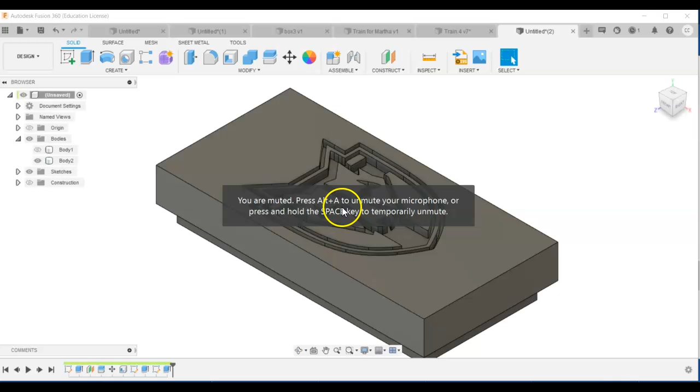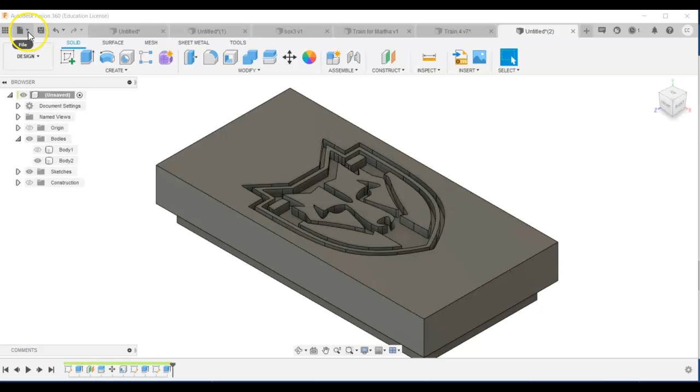Okay, in our last video, we showed you how to insert a graphic and use it for things like an extrude cut like this. But we want to make a box that is nice. We don't want this rectangle. The rectangle constricts us. And so for this next one, and this is your assignment, you're going to make a box that's based on the design.

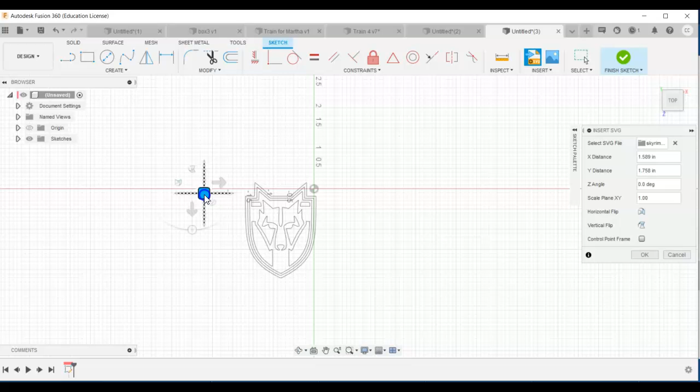So I'm going to go ahead and put another top-facing sketch and insert that same Skyrim SVG. So there it is. It's in my downloads, and there it is. It's a little big, so I'm going to pull it over, and then I'm just going to shrink it to what I think is about 2 inches by 4 inches. Maybe a wee bit bigger than that, and just kind of center it over the datum. And when you get it someplace nice, say okay, and now we're looking at it down from the top.

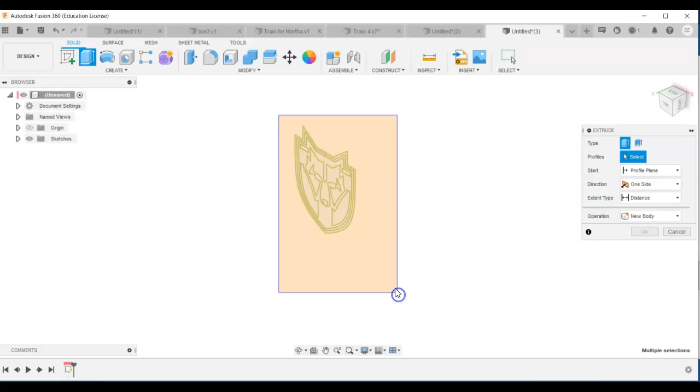The next step is to select everything. Let's finish the sketch. Select everything, and we're going to extrude everything. And we don't want to go that way. We want to go this opposite way. So how big was the box? 1.2. Just looking at it and the size it is, I'm going to go 1.5 negative. So that direction is really going to make a big difference in a minute. And right now you can't see it, but the sketch is right there, and that's kind of where we need it to be.

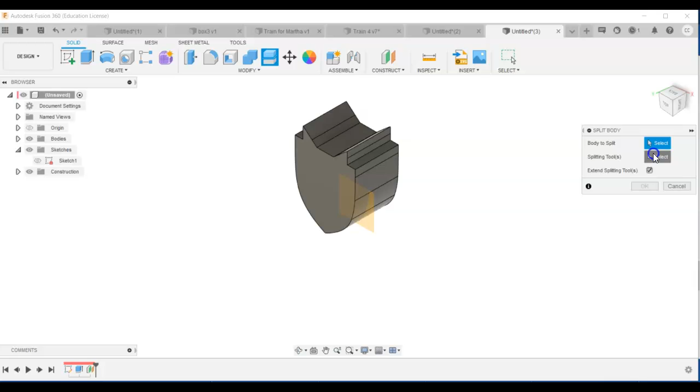So using the same tool we did last time, I'm going to put a plane on this face, and I'm just going to offset the plane by 1/2 inch. And then I'm going to use that split body tool, and here's the body. My splitting tool is once again the plane, and I guess it didn't pick the body. So there we go. And now it's going to split. For this one, I'm going to leave the top of the lid in place, and I'm going to move this part back. And so there's the big part of the box, and here's the lid for the box.

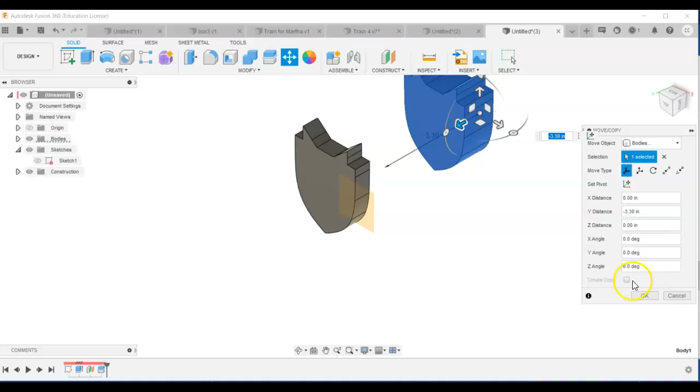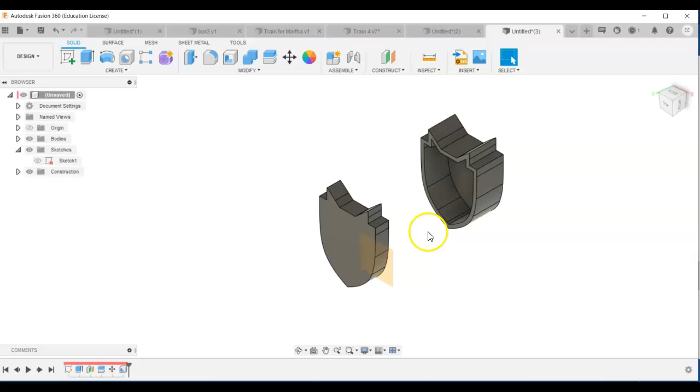While this is groovy, I'm going to go ahead and shell this. And my wall thickness is going to be, let's go 0.125, so 1/8 of an inch. All right, and so that looks pretty good with the ears and everything. I was kind of worried about that. I'm going to go ahead and flip it and make this body here, body 1, invisible. I'm also going to make the plane invisible.

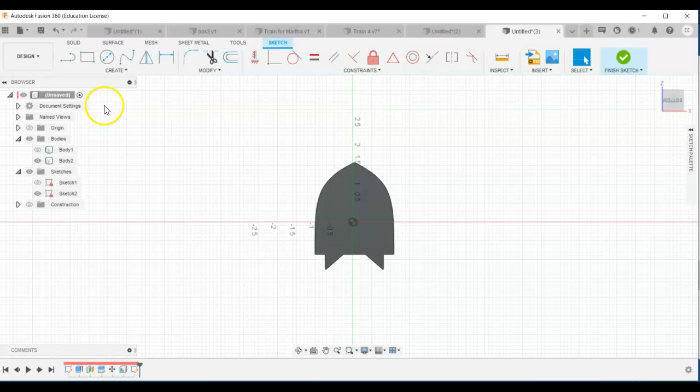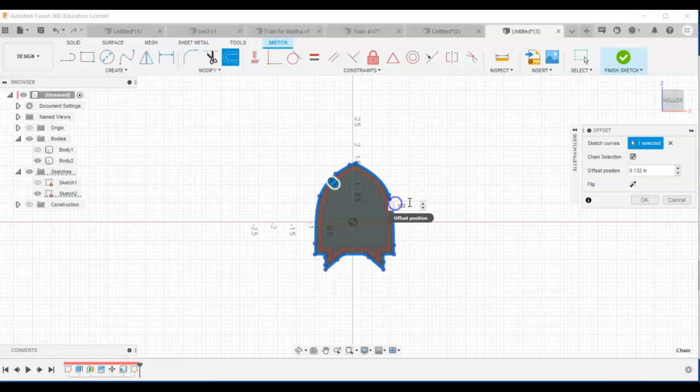I'm going to put a sketch right on this surface. Just like we did in practice, I'm going to use offset. Oh wait, I forgot to project. So let's cancel that. Hit P for project and just project that edge. Okay. Now I'm going to offset the edge, and it's going to be our magic number, and we made it 0.125, so it's going to be 0.132. So that's an extra 7/1000ths, and that is right. Correct? Yes. Good. So this gets a little mini extrusion.

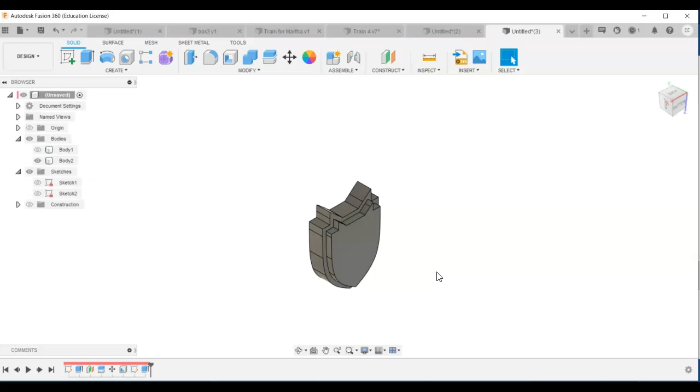And that mini extrusion is just going to be 0.125. So I'm working in 1/8 of an inch on this. Actually, I don't like that. I'm going to make it a little bit bigger, just so that when they interface, it really kind of holds itself together. And go ahead and turn the other body back on, just so I kind of size it up and see, is that going to work? And I think it is. So let's go ahead, invisible the first one, and turn on sketch 1. So now I've got sketch 1 activated. I'm going to go ahead and make some extrusions with that.

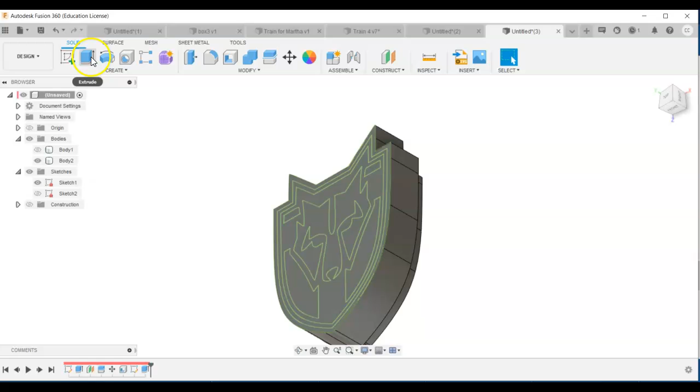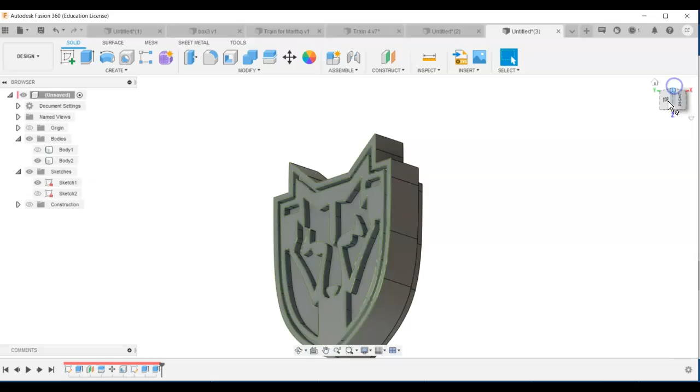Select this, and this, and this, and this, and this, and then skip one and select this. And what do I want to do? I don't want a new body. I want to cut. And where do I want to cut it? About 1/10 of an inch in. So now I got this nice textured lid. It's Skyrim-esque. I could select a face, change the appearance of the face.

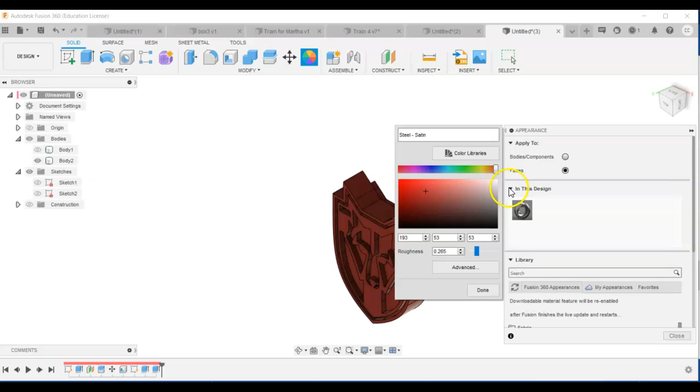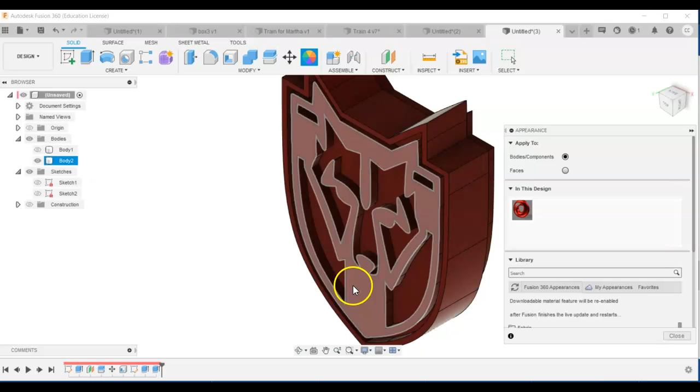Boink. If you guys want to do custom appearances, I'll show you the way. You could double click on this. It opens up this palette, and wow, it selected everything. So let's not do that. I just wanted that one face. Let's undo. Anyhow, this video isn't about adding an appearance to a face, but let's just try one more time. So faces. This is the face I want to do, and it does the whole thing. It's almost like doing a body instead of just a face. We'll mess around with that later.

In any case, I want you to make a box that is based on the graphics rather than based on the rectangle. And who wouldn't like a little Skyrim box with the Solitude symbol, shield symbol on it?